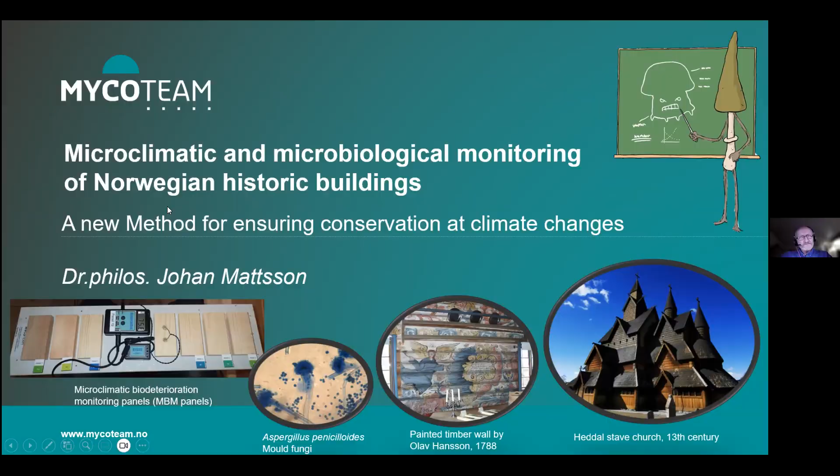As mentioned, I work mainly in Norway, and typically you can find problems in all kinds of buildings, so both heated and unheated buildings have different problems with the climate and also the climate changes. So we can see that the effect is universal, but we are especially focused on the problems in Sweden and Norway, and in different parts of Norway we see variations, but still the same pattern of changing climate, and then also the change of biodeterioration rate.

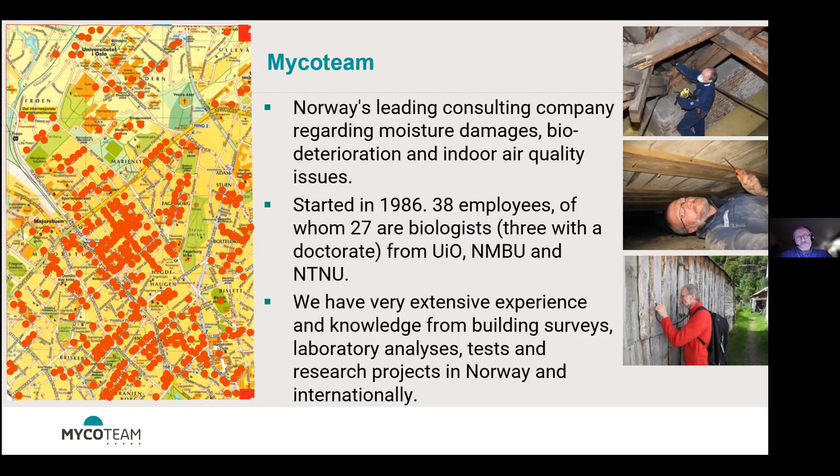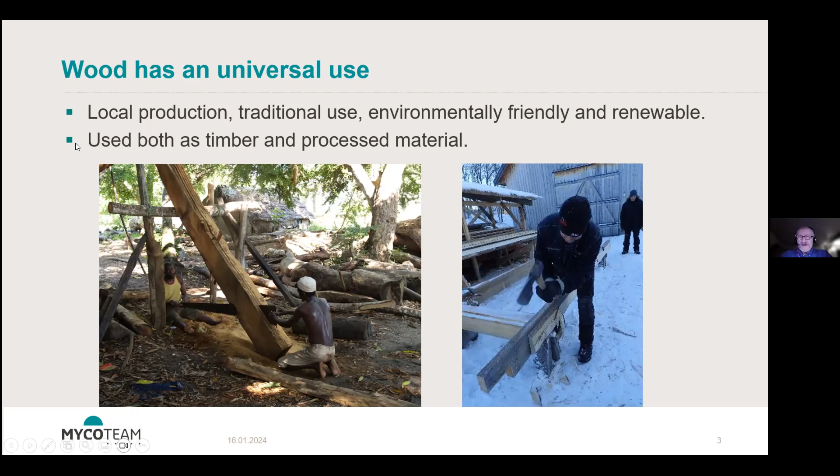So, of course, we have to do a lot of field work to get this experience, but we also have to realize the similarities and differences between different building styles, building climate, building wooden materials. We can see the pattern is quite often the same, even though it might at first glance be very different climate conditions. Wood is very essential in many cultures and many buildings, and the wish is, of course, to achieve as long a service life as possible for the wooden materials.

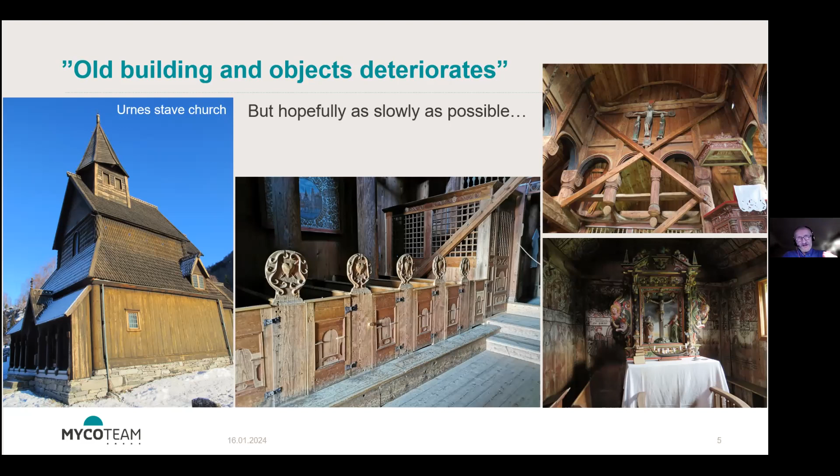And of course, many materials are standing for a very long time without damages, but we don't know. We can't be sure in each case that it will be an eternal life. So we have to be aware that the risk of getting a problem is always around the corner, and climate change increases the risk, in some cases quite significantly.

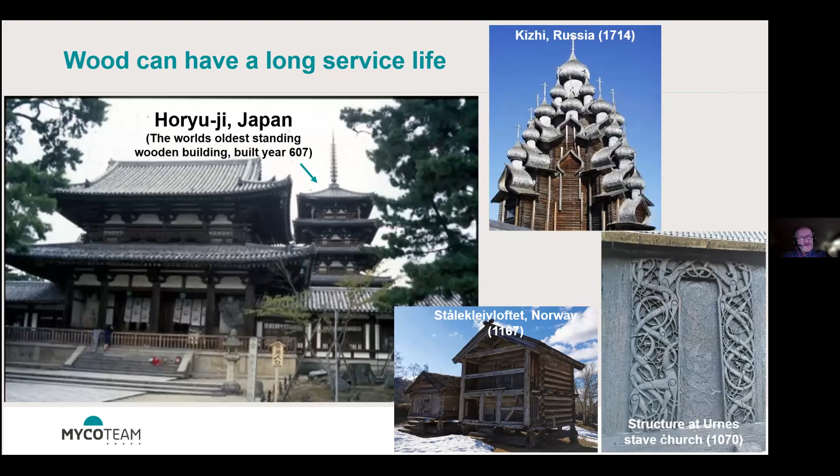We can, of course, always find examples of building materials and building constructions that will stand for a very long time without much damage. So we can see that it's possible to achieve a long service life, but in other cases, it's not so easy, and we see that the damages are occurring quite fast, even though we wouldn't expect it to be that critical.

So the problem is to understand the microbiological activity, what is causing that. And of course the effect is easier to understand: if the fungus attacks the wood and deteriorates the cellulose, the strength of the material is reduced, and the surface is also deteriorated eventually. So then we have a material that doesn't work as it was initially planned to.

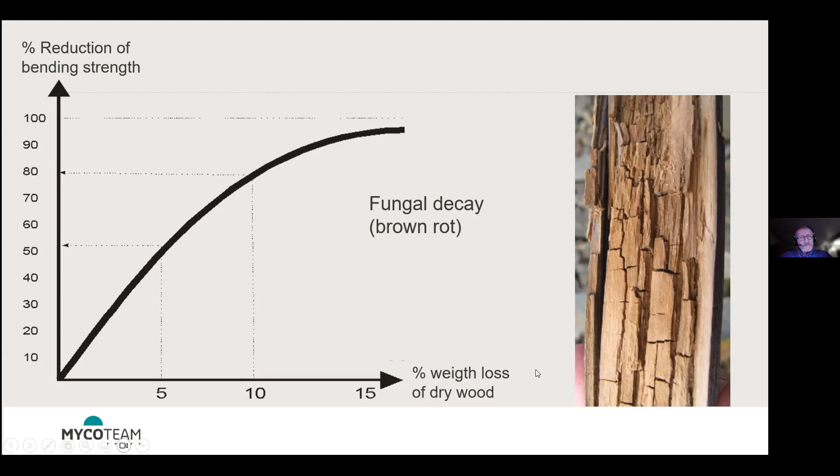So the result is what people normally observe, but they don't normally observe the causes, the reasons for this kind of development. So bearing in mind that I guess I'm more or less the only biologist here, I try to make it a bit basic first. And this is as basic as it gets, because the plants, the tree, are making cellulose out of thin air, as a matter of fact, and water.

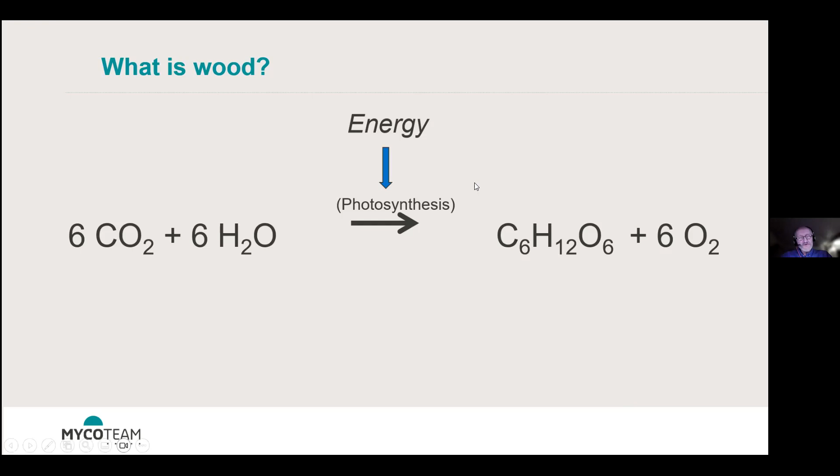And of course, with this energy-consuming activity, we get these cellulose molecules, the long molecules that make the wood materials. But if you invest some energy, it's always possible that this can be reversed, and that is biodeterioration in a practical sense. We have the energy from the wood materials by deteriorating them. The fungi and the insects are getting energy just as we do when we are eating food. So it's a quite natural occurrence, the decay of wood.

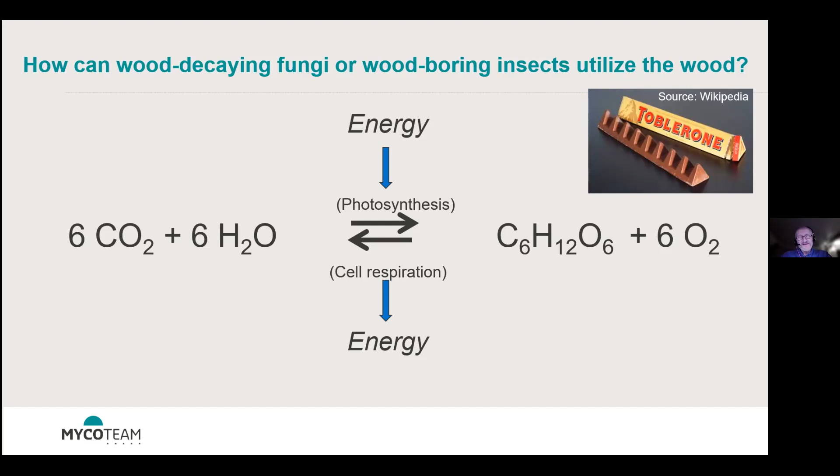So this is the basic function of fungi and insects, to reduce the wood to simple substances so that it can be reused later on. And even though cellulose might not seem very attractive, it is really what the fungi try to deteriorate, just as we have our favorite glucose sources. So it's not necessarily very complicated to understand this if you have the basic knowledge. And this is what you really need to understand when it's changing, when it's not a normal

situation. So the main question is, as always, is it okay or decay? But that is not necessarily so easy to answer, because it differs between buildings and climate areas. But often I think it doesn't have to be very complicated. Take one mental and physical step backwards and try to see what are really the main causes of any biodeterioration; then it's not so complicated, even though people think it might be very difficult to understand. It's often very easy if you have an overall understanding of the climate, the building material and the exposure.

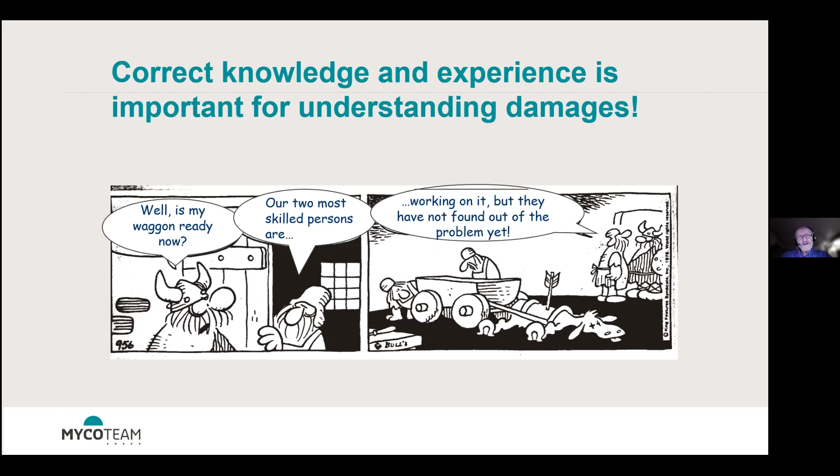So then you quite often think, is it really so simple? And yes, it is, because for fungi, water is the main agent they need for heavy activity. So just by looking for the wet parts of the material and the exposure, we have a quite easy way to at least find the critical areas, and by that the main reason for what is happening.

The challenge, of course, is that we have experience, we have knowledge of what's normally happening, but if the conditions change, the reactions might change as well, and then we don't necessarily know what the result is. It's more unpredictable, at least at the start, when we don't have long-term experience of the results of climate change. We have just a start situation, a glimpse of understanding, and in the future we'll get a better and more detailed understanding of this.

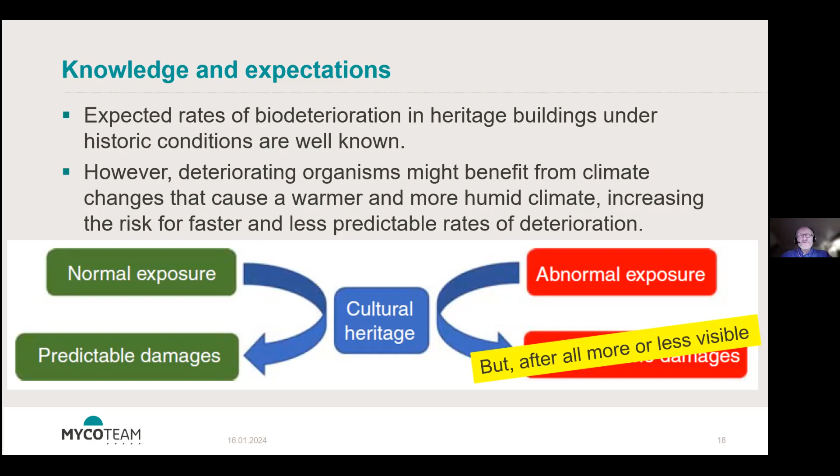So right now there's perhaps some uncertainty about the consequences, but still, if the fungus is growing better, that's something we can observe. If new species occur, we can observe and understand this. So hopefully it's so basic that we can figure out what's happening quite early in the process. But of course, the question is, what are the possibilities to reveal this?

And normally we have the building survey. We go out to the building, observe for some hours, try to understand the situation, and then we predict the future. Of course we can see what has been happening, but we don't really know the future just from observations by one visitor to a building. So indirectly, if there's some deterioration, we can understand what the reason has to be, but not necessarily the situation for the future just by observing the old damages, even though they are an excellent information source in many cases.

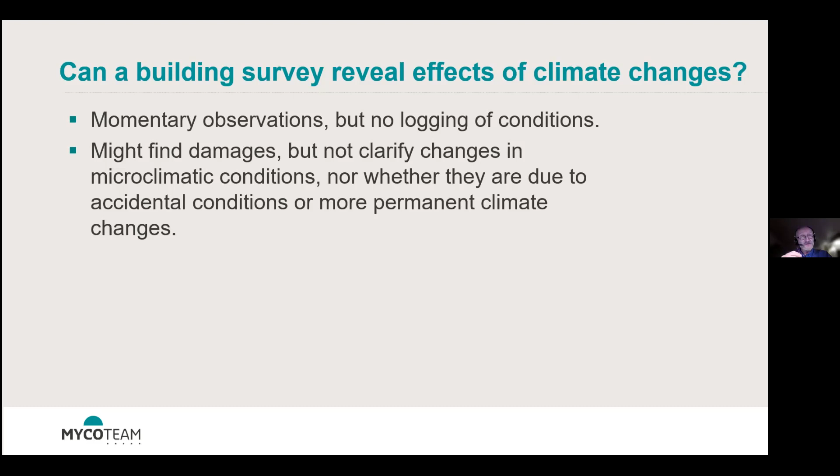So first of all, we have to find the risk areas and where is the highest risk for any new development or further development of biodeterioration due to climate change. And of course, it always has to be a bit complicated to find the critical areas and to get access to that part of the construction, the part of the building.

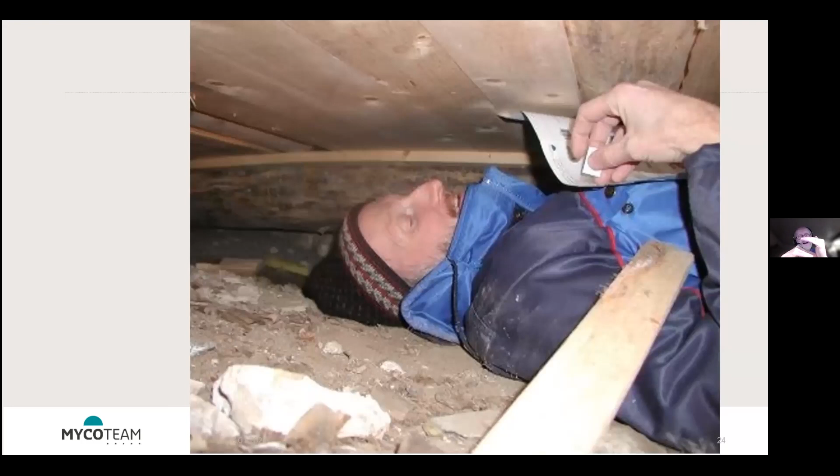But usually it's possible to do that more or less easily if you have the right mental thoughts about how it would be done. Because there is a possibility to see the highest risk for development due to the building physics and the effects of the climate exposure and the climate change.

Typically in crawl spaces, we see that you have this water, the damp situation from the ground, but also this summer condensation problem when warm, damp air comes into the cool crawl space due to ventilation, and then we have a change of the relative humidity due to the lower temperature, and then there's a risk for quite common and extensive damages of that construction.

So there might be a risk that you cross the border and then suddenly it's too wet and then it starts to decay by fungi or insects as well. So we have to understand what is the risk for the future just by experience, and that is not necessarily the best way, as I will tell you later on.

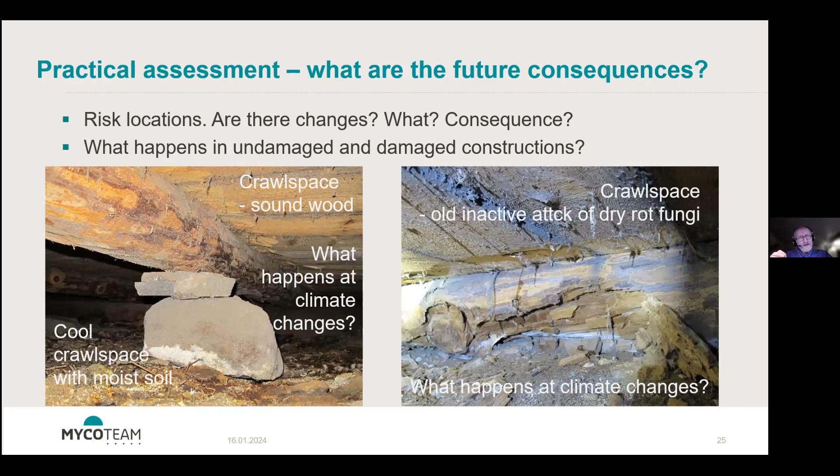And also, in general terms, we say it's getting warmer and wetter, but that is very little help for understanding what will really be happening in the microclimate. Because if warmer, is it warm in the summer or in winter or in the fall or in spring? Because if it's warmer, it might be drier because it dries out more water from the soil, and also a more humid climate. It's a bit difficult to really apply that to buildings because it might be just a small change that is not critical for the building.

So in order to understand that, we have to start monitoring the situation so we know what is really happening and what is really a risk for these changes. So some places in Norway there might be more rain, and other places less, and the temperature might increase in the summer or the winter. So we have a lot of uncertainty in this general information.

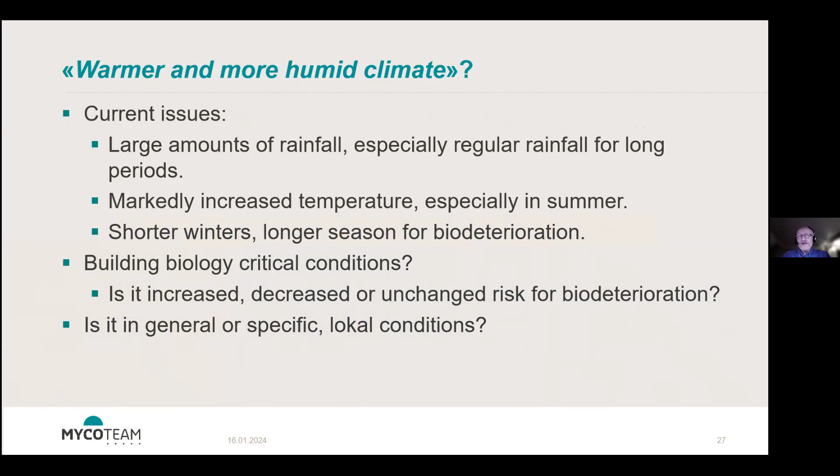And also there are some general illustrations that have been used that are nice for politicians or for just a general understanding, but they're useless, in my opinion, for understanding what is happening in this building, in this room, in this crawl space, because the Scheffer index, for instance, is made for outdoor exposed wood. It's not the same as wood in a floor construction or in a roof construction. So we have to understand that these climate models are not useful at all for understanding the risk of biodeterioration in buildings and building materials.

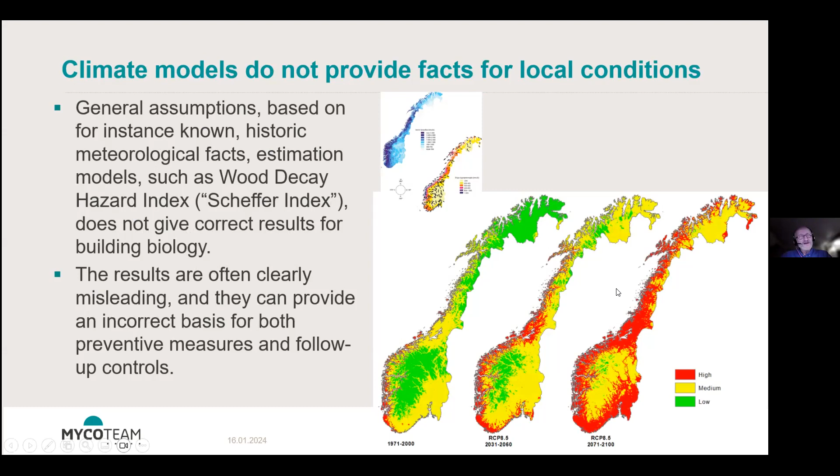So even though it looks very fascinating with these maps with different colors through time, it's not something that we should take too much effort to read about. On the other hand, if we go into the microclimate, then it can be very interesting, because then we can see what's really happening in those specific materials, constructions that have some history. We see what the condition is right now, and we can see what will happen if it rains more on this log wall, if it blows more, if it's a higher temperature.

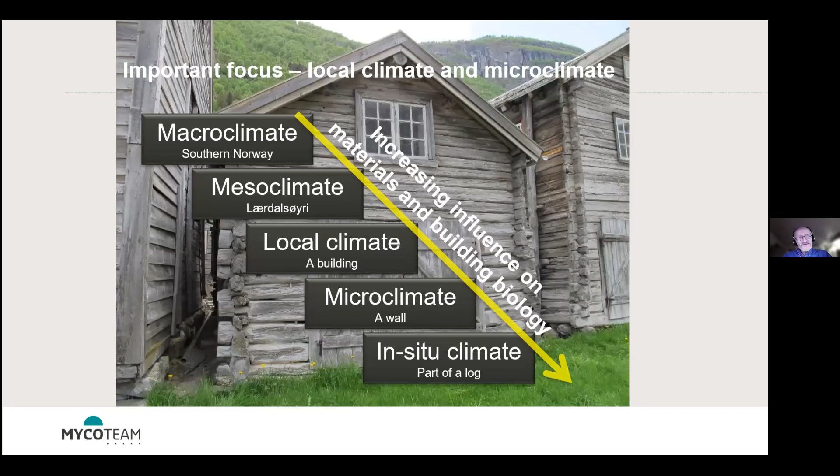Then we can start to really pinpoint the risk for different activities, or perhaps reduced activity due to more wind drying out the water from the materials. So microclimate is the really essential understanding we have to bring into these thoughts about what will be happening with the buildings. So this is something that has a very special place in my heart, because that is basically my thesis I made 7 years ago.

And if you haven't read that before, if you send me an email, I can send an electronic copy to you at least. And perhaps you can place it on some website. It's okay for me also, because I think it could be nice for people to understand more about the biological approach on these microclimate conditions.

And this is about the World Heritage Site at Bryggen in Bergen, the west coast old town Lærdal with house longhorn beetle issues, the World Heritage Site of Røros, a city in a mountain area, and also Svalbard. And in these areas, especially in the cold areas at Røros and Svalbard, we really see that climate change is happening. So it's a higher temperature, a shorter winter, and a longer growth season for any plants that might be in that area. And of course, if you have a fungus in a log construction and it's not freezing cold most of the year, then there's a higher risk of biodeterioration.

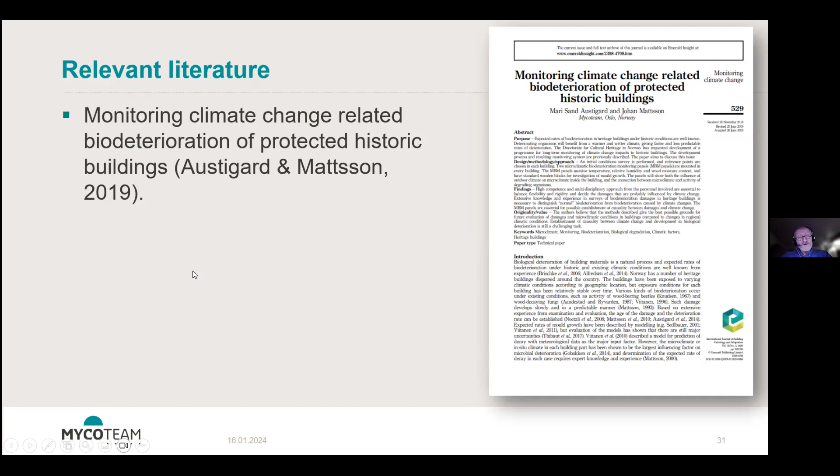But as I mentioned, these climate models and also the general information from governmental institutions is often very general, and it doesn't really teach the reader much about the real effect of climate change. It's more or less: in general, it's getting warmer and wetter, and then it's focused on it might be more decay, it might be more insect activity, so be aware. But that doesn't really help me as a house owner be aware of what, and how I can really be in front of that development.

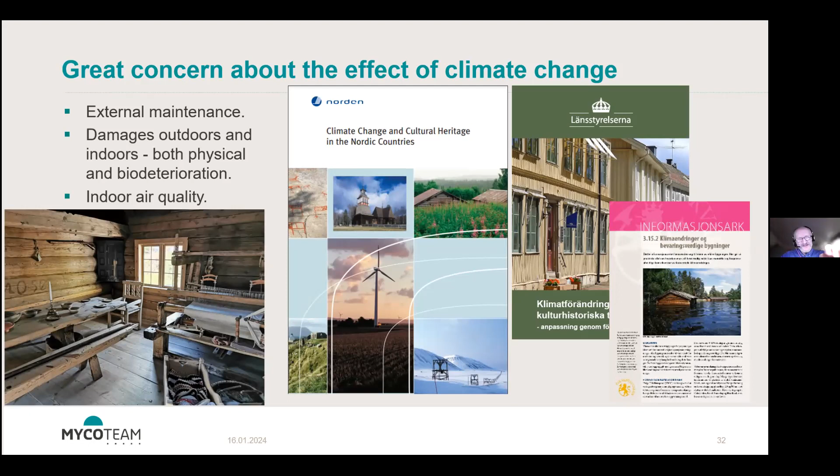So this kind of information is not enough for really handling the risk of biodeterioration in old buildings. It might be said that you have to do more maintenance outdoors, but of course that is not very different from what you might do already. There are a lot of questions you might have that are not answered in those kinds of information brochures from governmental institutions, at least not in Sweden and Norway, which are those I have read. So it's not enough for handling this. And of course, it depends on what the risk is.

There has been a lot of discussion in Norway this autumn last year about extreme weather conditions and what effect they might have on buildings and building damages like biodeterioration. And this is an illustration that, of course, if you have a flood situation, it doesn't really influence biodeterioration. It's short term. There might be physical damages and all that kind of problem, and for mold there might be a raised risk, but for the others, it doesn't matter if it's wet for a couple of weeks or something like that.

If there's more intense rain and a larger amount of rain, then of course there might be some increased risk for mold activity on exposed surfaces at least. But the others don't really have that kind of immediate response to extreme weather. But of course, if you have a longer period with rain, so the materials don't get time to dry out, or a longer period with increased relative humidity, then very typically you can see mold damage occurring quite fast. But it takes years before you can find wood decay damages caused by fungi, or by insects.

So this theoretical and semi-practical revealing of facts is not very easy to handle, to understand what is really the risk. And also the wood moisture content should imply that you have some decay problems in wood, and still it's not the same risk in a practical sense as these logging results suggest.

So we have to understand that the reality, the biology, has much more variation and local variations in buildings. So it's not easy to really say this is a clear risk and this will happen. Now we make it more in general terms.

But you see this typical fungus that is an early sign of something happening. This Aspergillus species is typically a xerophilic species that can grow well at 68 to 70% relative humidity in otherwise good conditions. It's not necessarily happening very fast, but if you see those fungi starting to occur in a building, then we realize something is happening, especially if it didn't have that kind of attack earlier.

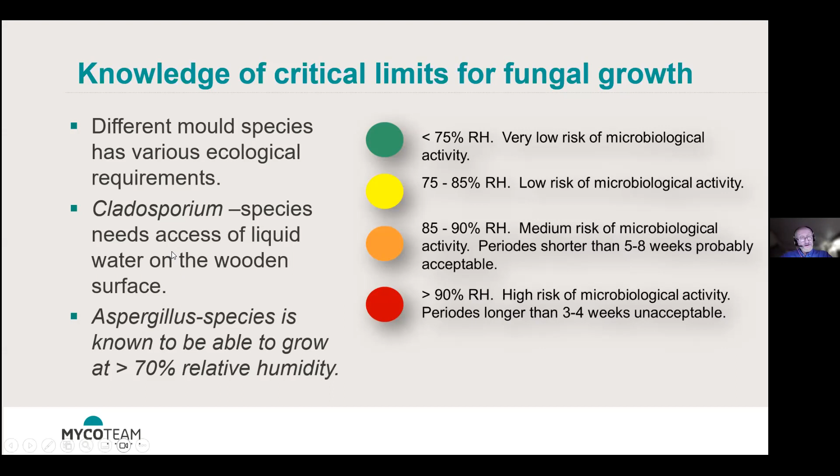So the information we can get out of a damage, whether it's a wood-decaying fungus, some insects or some mold fungi: if you have that species growing there, we realize that this fungus is a biodeterioration monitoring device. So we can get a lot of information about the reason for this activity just by understanding the biology.

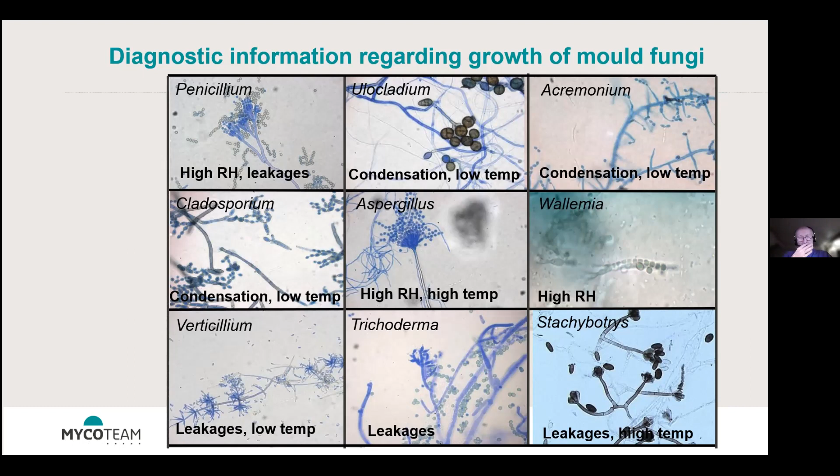So it's important to really look in detail at the actual damages and not only remove it and curse the fate that you had this kind of damage. We have to realize that this is an excellent information source for understanding what has been happening so far. So it's not necessarily difficult to understand the activity. We have to realize there have to be four main factors at the same time in order to have a risk for biodeterioration.

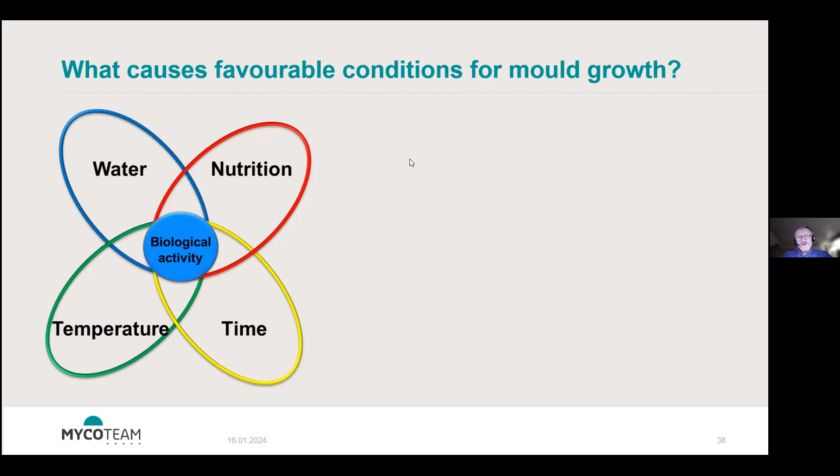It has to be wet, with some nutrition, a favorable temperature, and long enough time for development. And then we can understand, by looking at these four factors, why we have a lot of mold growth on this spoon in an unheated storage building, lying on a wooden table. The temperature is the same, the humidity is the same, the time exposure is the same, so the only real explanation might be accessible nutrition.

And then we can realize that this spoon has some remains of porridge from 1700 something. So then it doesn't have to be a large effort to avoid mold growth in that storage. We don't have to install a dehumidifier, or heat it up, or do some extensive treatment. We just have to understand that it might be just a small effort that has to be done to avoid that kind of mold growth.

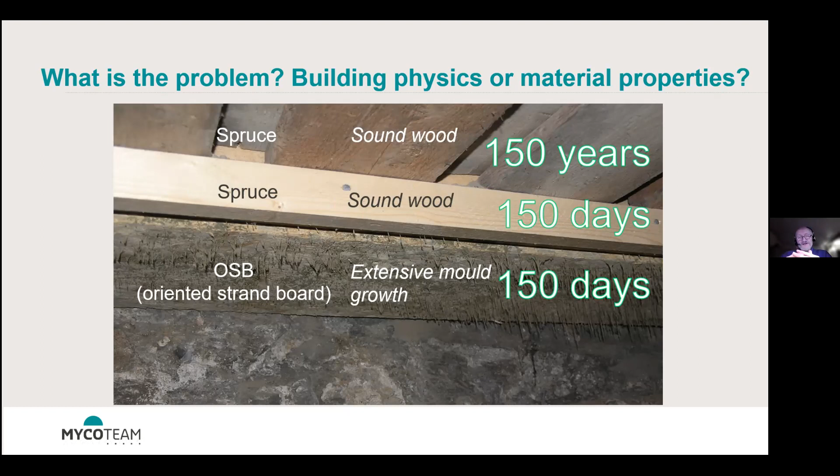And we see commonly that it might be small variations in material properties that cause or avoid damages. Like in this case, it's an old floor that has been in a damp basement for 150 years without any damages, and it was repaired due to some external water intrusion. The new wooden materials had no problems in the first 5 months, but in other materials, this oriented strand board material has extensive mold growth at the same exposure time as the other materials. So we have to understand that risk is not universal, but very dependent on the material properties.

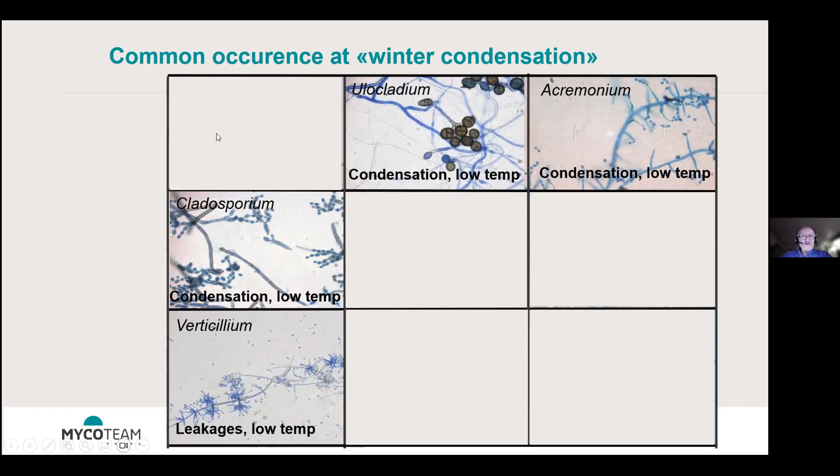So then we can see that, okay, we have some fungus. We understand the building physics by just reading the biological literature. And otherwise, we have other species, and we realize what has been happening here. It's typically winter condensation.

But of course, it's interesting when you have an old church that has had more or less the same conditions for many, many years. And then in one summer, last summer, it got quite extensive mold growth on some of the surfaces. So we can see that summer 2023 was extreme in one sense, because now there was some new damage that hadn't been there before.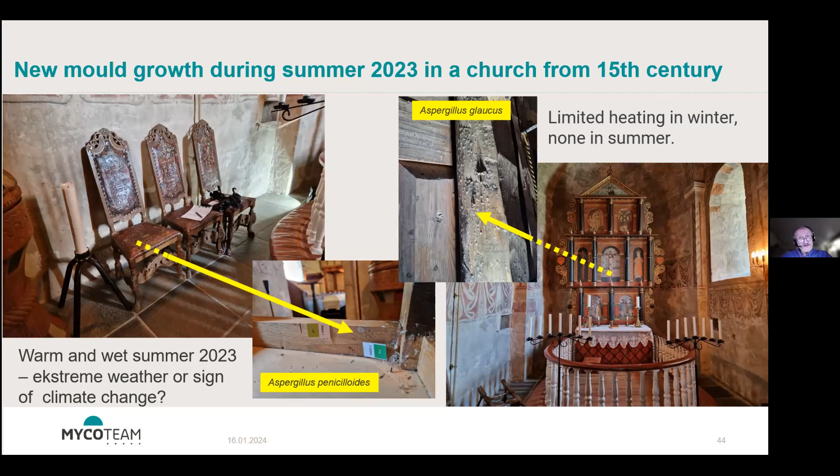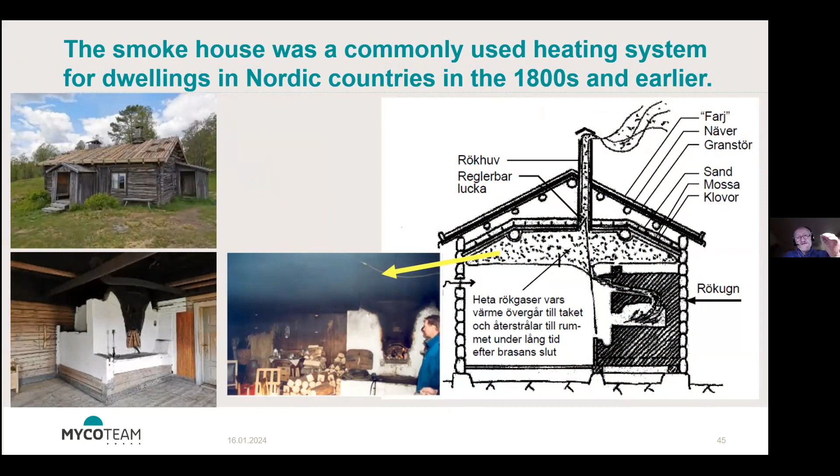And in other buildings that were used and moved out of many years ago, we can see that they're starting to get new damages that haven't been there earlier. Traditionally, there was no mold on these sooty surfaces up in the roof construction. But in later years, we see that there has been extensive development of mold damages on certain surfaces. We can understand by the building physics why it starts to grow there, but it's very hard to understand why it didn't grow there 50 years ago, 100 years ago, but just the last years. And this is really a sign of a change that is going on.

And since it has been raining a lot previous times as well, this might be a typical example of an early warning sign of climate change influencing biodeterioration. Especially when you see it follow the pattern of the specific species that grow at low relative humidity compared with other mold fungi. So this is a first critical signal of damage development, which we should be aware of.

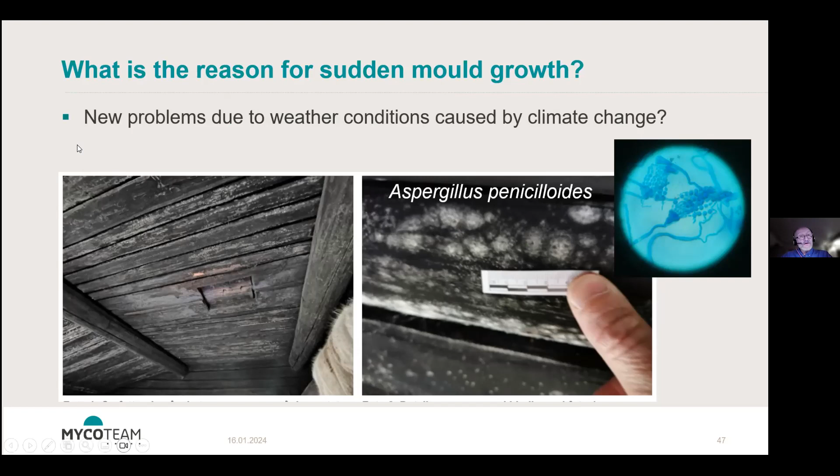That was not correct. So this project where we have gained this experience from Norway is a project that the Directorate for Cultural Heritage in Norway started 6 years ago. And it's supposed to be running for like 50 years, so it might not be possible for me to write the final report, but at least it's interesting to be a part of the start of this project. It's not only about medieval buildings; it's 45 buildings here in Norway that have been examined, and we also have this monitoring activity.

In these buildings, we have one monitor up in the attic and one as low as possible in the building, in the crawl space or under the floor, if it's possible. And they are spread around Norway as much as was possible for different reasons. So we have different kinds of buildings and different kinds of weather conditions, and then it's possible to find the similarities and differences by statistical analysis.

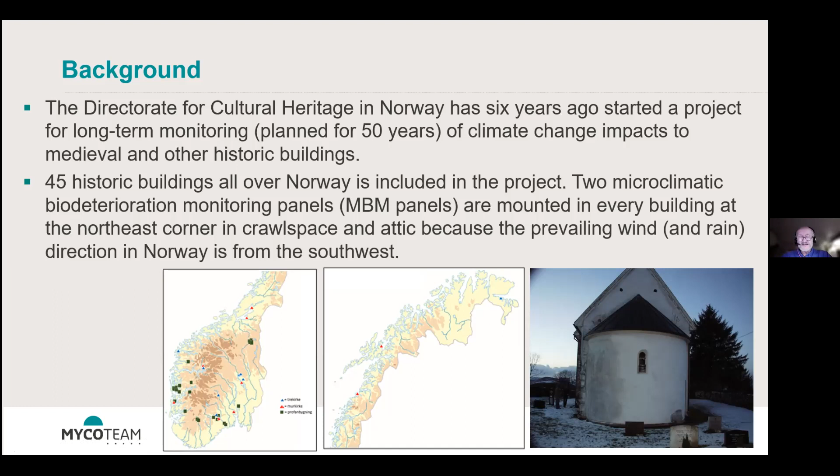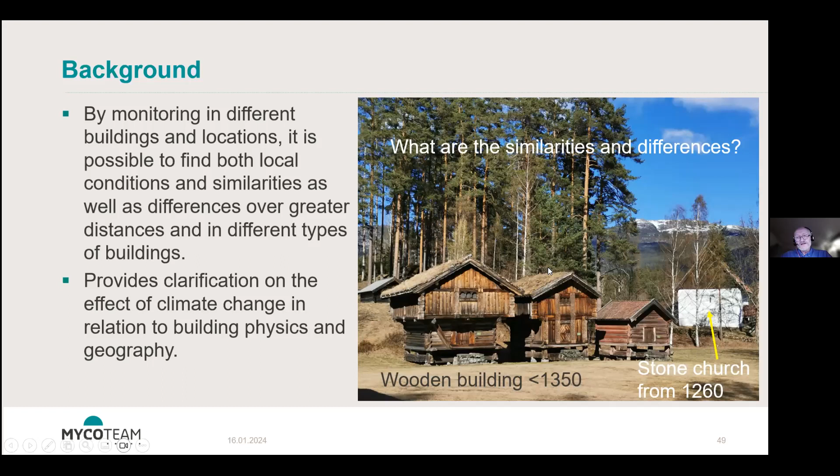And then we can try to understand, as I said, the similarities and differences between a wooden building and a stone church just right beside the wooden buildings. Can we see a pattern of the damage development due to climate change, or is it so much depending on the construction material and the microclimate in one single area that it's not possible to compare those two buildings even though they are just a few hundred meters apart?

So what we have installed in all these buildings is this panel monitoring both the temperature and relative humidity, and also the moisture content in wood. And these are standardized wood blocks that are used all over the project and also in some buildings in Sweden. So we know that we have the same conditions, the same nutrition in the wooden blocks. It's very, very unified, these conditions.

We didn't have so many thoughts about how fast it would grow, but at least we have a standardized method to monitor and to see what could possibly be any damages. It's very kind of Stone Age. It's not something you see on the telephone, but it's very reliable because it's all over Norway, and it has to be so simple, so robust that we can understand that this is really working.

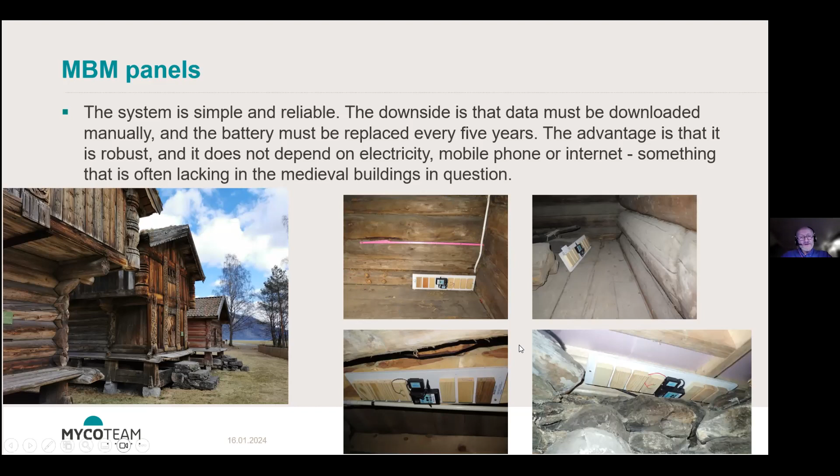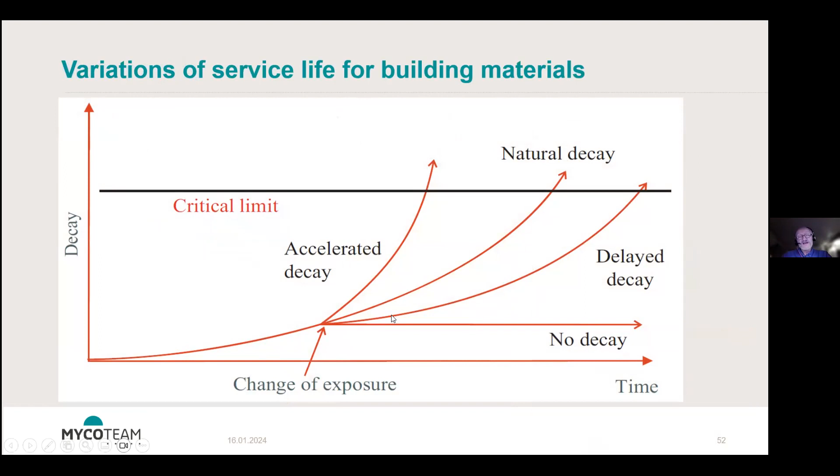So we place them in both low and higher parts of the building, and we see if we get activities that differ in different buildings, and not necessarily just decay, but also mold growth, for instance. And we can see that there has been surprisingly fast growth on many wood blocks by mold fungi, and this specific xerophilic mold fungi. So we can see that this is really happening so fast.

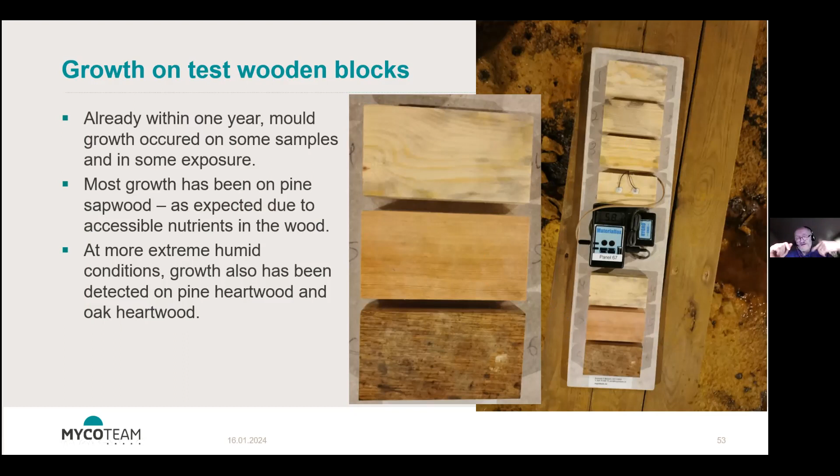And then we have both biological monitoring by the growth, and physical monitoring by the instruments here. So then we can compare very much what is really happening, where it's growing or maybe not growing. And we have this monitoring data from temperature and relative humidity. So we can start to see what is really happening here and what is the difference from other buildings and similarities. And then we can see the pattern of different mold fungi and how extensive the damage is.

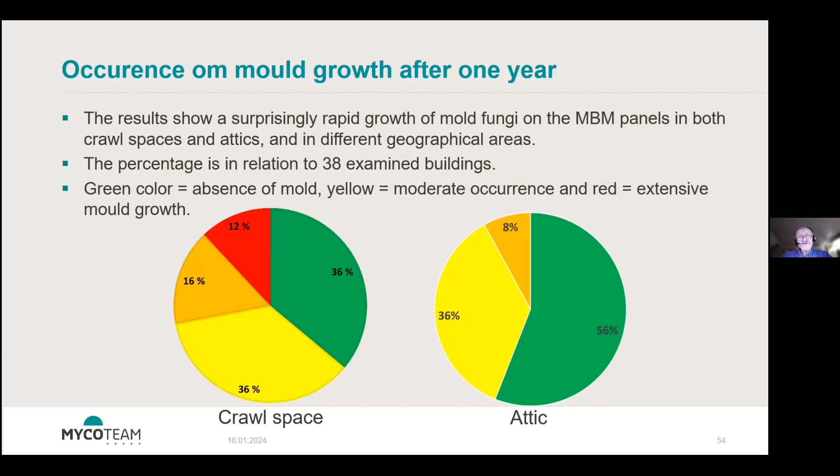So we're starting to get some results that we will publish eventually, but now we have to struggle with all this information. But in short, we can see that already in a very short time, in the crawl space, there might be extensive mold growth on these standardized wood blocks. At the same time, there's less growth in the attic conditions. And we can see the pattern of the fungi is very typical for different kinds of building physics.

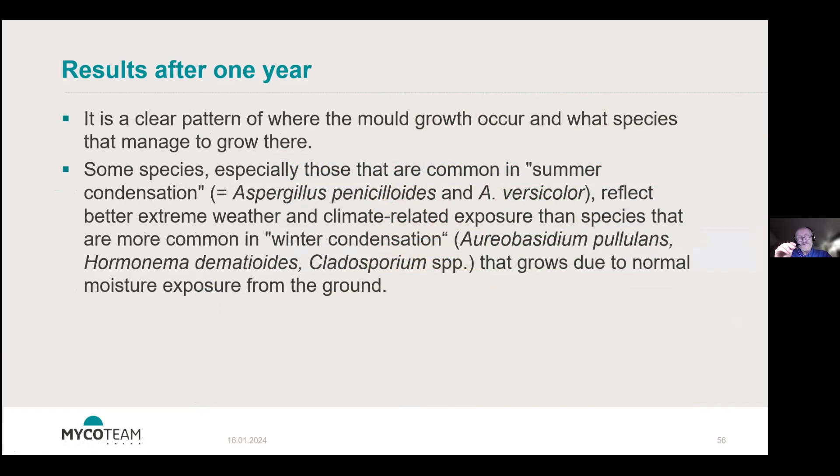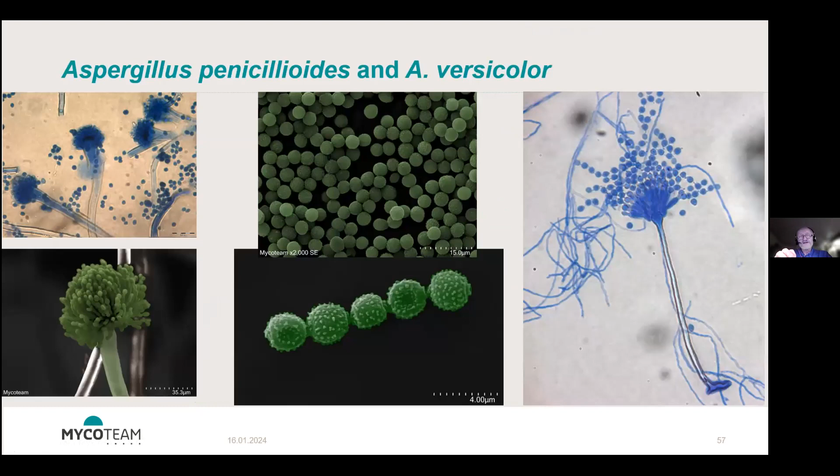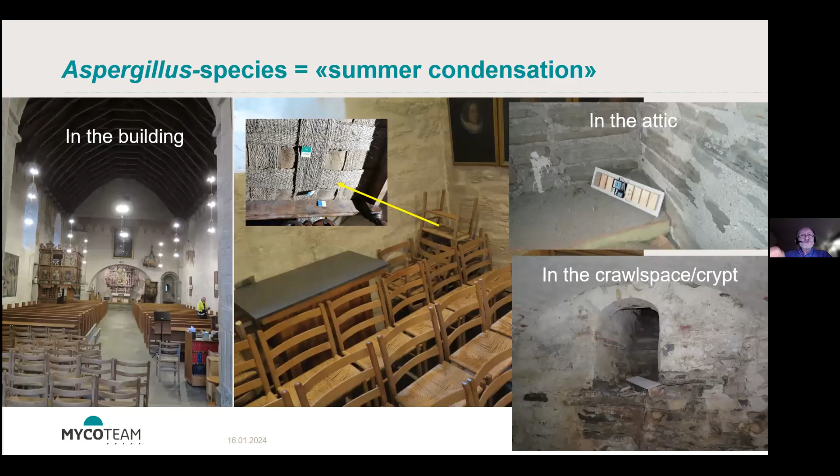And typically it's summer condensation conditions that dominate the pattern of what has been found already after 1 year. So you can see the pattern, and then it's very predictable what we expect to find on these wood blocks in these conditions. And that is a very good understanding, because we don't have that from earlier. Now we can see that these are typically some very significant species that occur in buildings on different surfaces in different parts of the building, and that can be used to recognize if something is happening that hasn't been before.

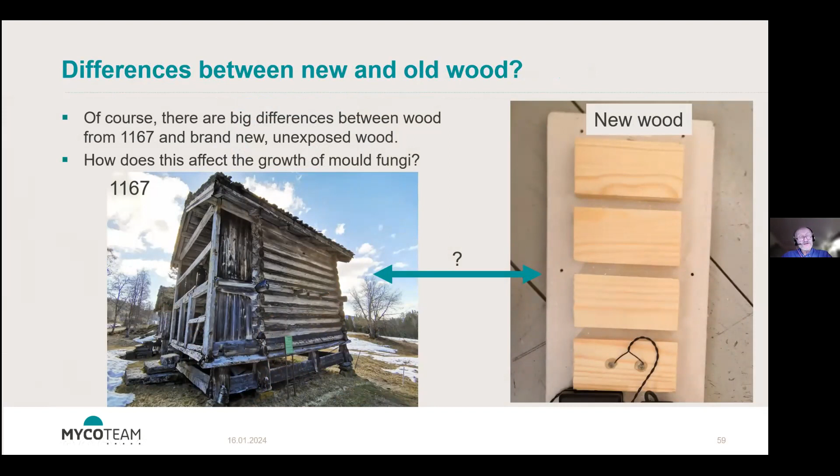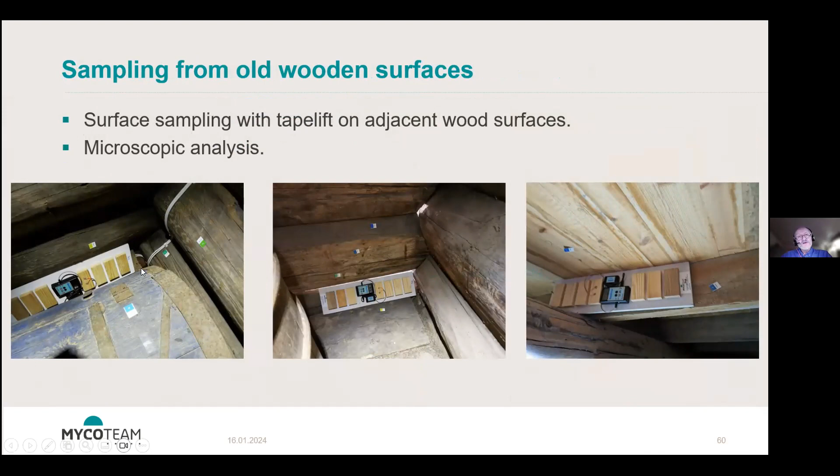And of course, we can compare how the old wooden materials work out in this changed climate compared with new wooden materials. So we have taken samples from the old wooden surfaces just close to this panel exposure, and first in this picture you can see that in each square here the color is changing from 1 to 5 years.

So it's a clear development in many different buildings, both down in the crawl space and also up in the attic. So in general, we see that the wood blocks have a very good possibility to record the ongoing risk, the mold growth risk, in the constructions.

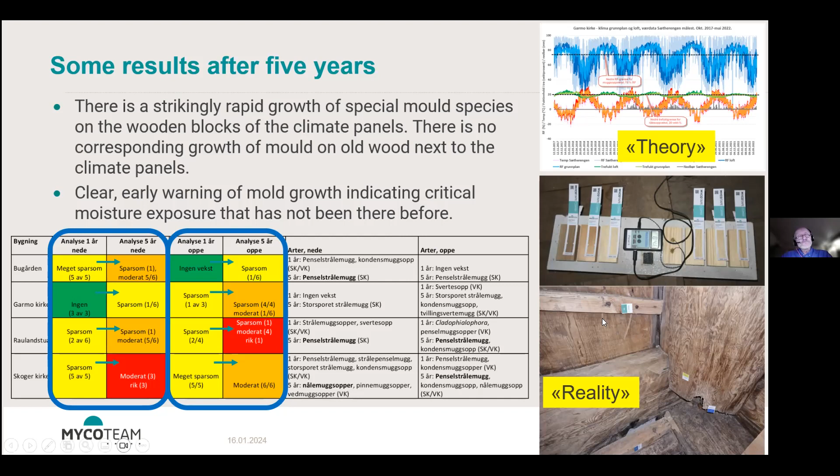But also, when we take these samples from the materials beside, we can see that typically we have a pattern both in what kind of fungi grow on the new materials and how small attacks there are on the old materials. So we can see that comparing old materials might be very difficult because they have different origin, different treatment, different historic exposure.

But if we compare this with a new standardized wooden block, it's much easier to see what is happening in different parts of the building, in different parts of Norway, and then we can see, is it really some pattern of climate change due to this growth we have? And so it really is possible for us to see now that

this logging device gives us a possibility to see how the microclimate is connected to meteorological data from far away from the building, and then we can see how well it is possible to predict the general effect of climate change and what is happening in detail in each building, in each area.

And the fast, quick growth of this xerophilic mold is also very interesting because it gives us a very clear pattern of the critical start of reaching the critical moisture content, relative humidity conditions. And we can also start to see the variation of the possible climate change in different geographical positions, different kinds of buildings, and different parts of the building as well.

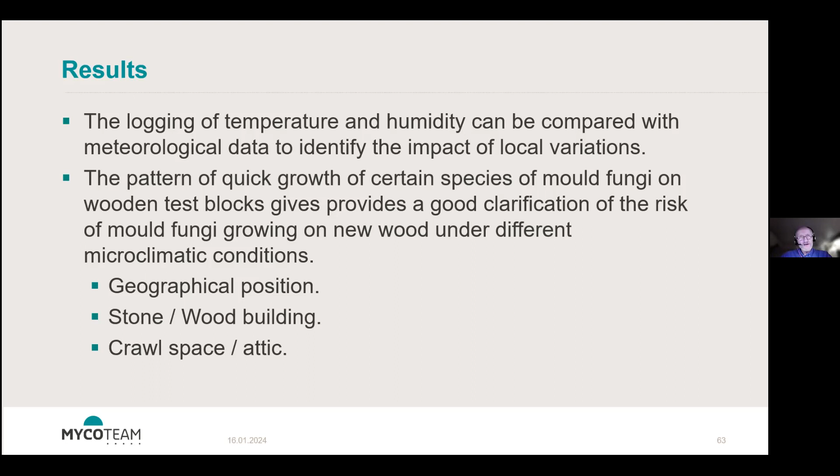So, of course, it has been so early in the project, we don't expect, and we haven't found, any wood decaying fungi in these standardized wooden blocks, but eventually that will be a clear risk for the future. And of course, we don't expect any insect activity in those materials, but since we know that the insects are requiring some microclimatic conditions, we can start to predict the risk for both house longhorn beetle and common furniture beetle in nearby other wooden materials in the area.

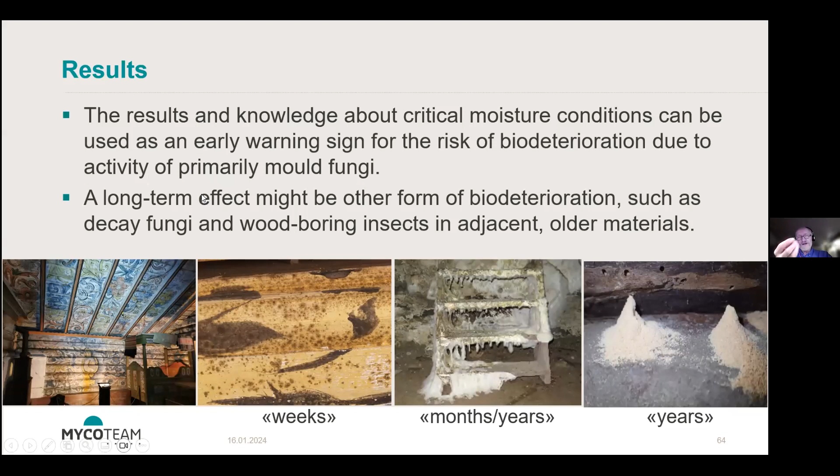So we guess that this will have a practical impact for the evaluation of buildings in the future. But of course, it's not something we see very fast. So we have to understand that 5 years, 6 years is not enough to really have all the answers. But we see that the possibility to get an early warning sign with these panels, with the biological monitoring and the physical monitoring, has really given us some new information that we didn't have before.

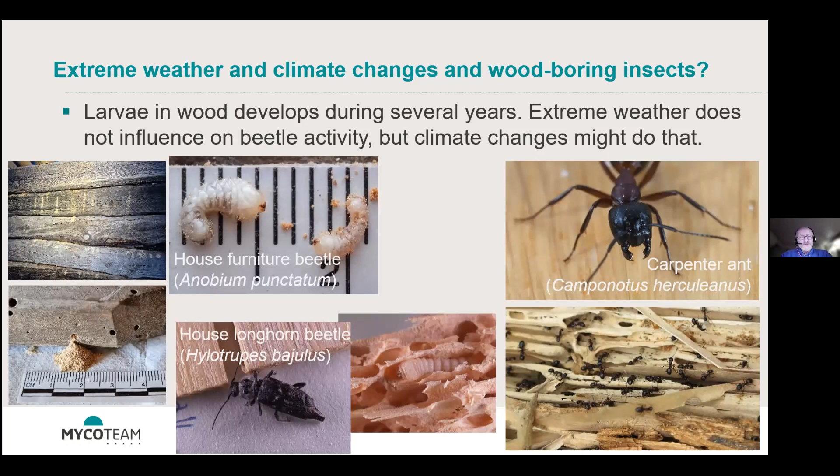And even though we have been working with this for 35, 40 years, this is something new that we haven't had available earlier. So from this kind of momentary observation, we see something and we interpret it to be typically climate change causes. It might not be that, so we can avoid this kind of miscalculation of the reason and the understanding, and put the focus on the facts we can achieve from these climate panels.

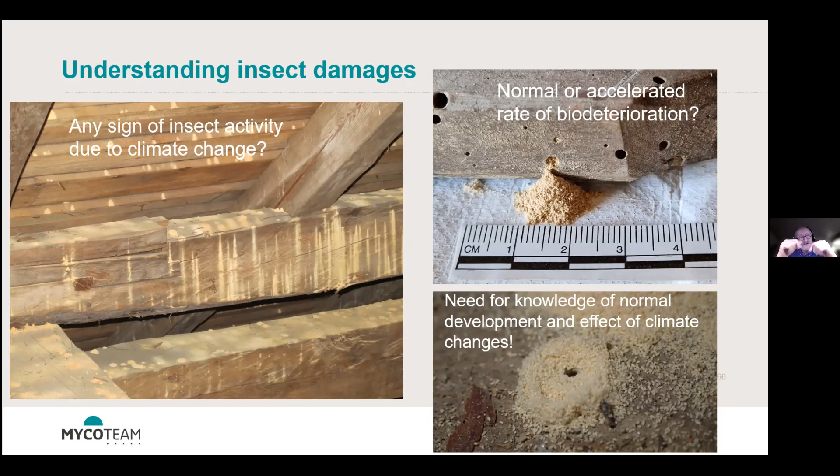So we think that we are really working in the right direction now in order to get as good and reliable information as possible, to find out what is happening and what can be done to reduce this humidity exposure back to a more normal condition. So we are quite excited about this

possibility to really pinpoint the risks in different buildings, and also the possibility to compare this over larger geographical areas. So we think that this is something that could be used in other places as well, in order to find very simplified and very unified information that is not just from looking at some old materials that you don't have the history knowledge about.

Here we know exactly what the background is, we know what's happening, and we can observe it at a very early stage. So we can see this is something new happening, and this is something that we have to be aware of in order to be able to save the old materials in the construction where this panel is exposed.